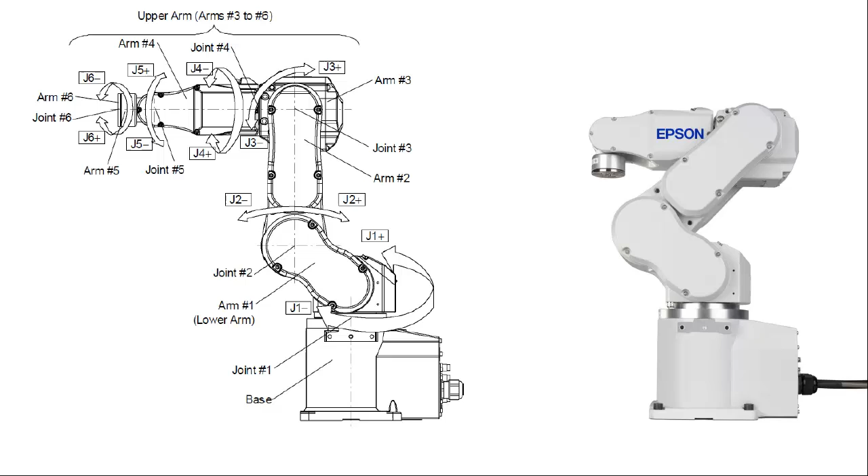The Epson C3 is a compact 6 degree of freedom robotic arm designed primarily for pick-and-place use. It is driven by either an RC170 or RC180 controller, a compact controller with Ethernet and USB connectivity that runs on Epson's proprietary SPEL Plus language.

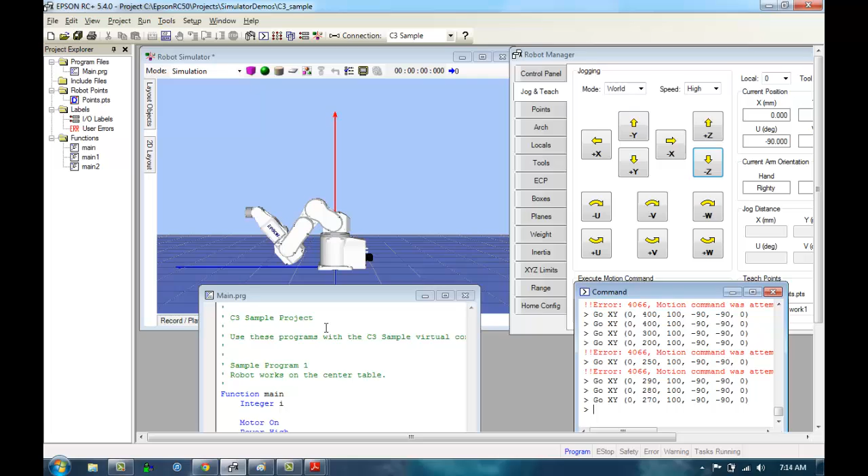The RC Plus 5.0 software is a suite that features a full simulator, including virtual TCP/IP communications in the full version of RC Plus, an SPEL Plus programming environment, also featuring command line functionality, and a robot manager and configuration interface.

To start out, the user first needs to connect to a controller. This can be a real controller or a simulated controller. In this case, I'm using a simulated controller, so in order to visualize what I'm doing, I need to open the simulator window. The RC Plus simulator allows the user to place objects of many different geometries in the scene. It is also able to detect collisions between the robot and these objects.

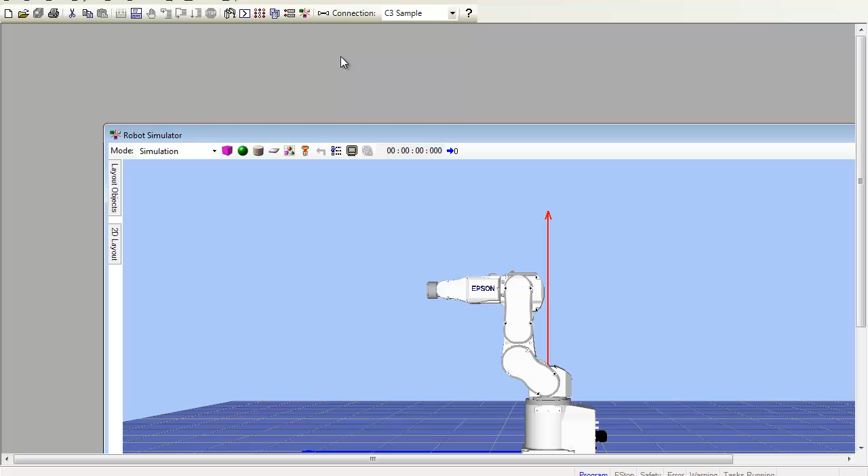We are able to test our SPEL Plus code on the simulator by running it using the Run pop-up window. This is a simple demonstration of a pick-and-place implementation using the C3. We're able to also issue commands using the command window.

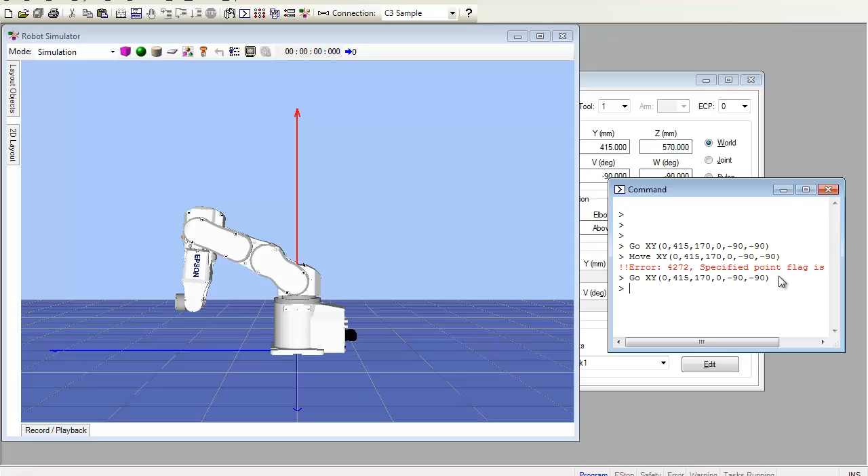The SPEL Plus language is a proprietary robot controller programming language designed by Epson. It runs natively on their range of industrial robot controllers, such as the RC170 and RC180. The language features a rich library of robot control and motion commands, serial input and output commands, multi-threading commands, and system management commands. It also features a number of mathematical functions, logical operators, and control sequences, as is expected from a programming language.

Since the language and controller have native support for TCP/IP communications, we are able to interface with the controller from any TCP/IP enabled device.

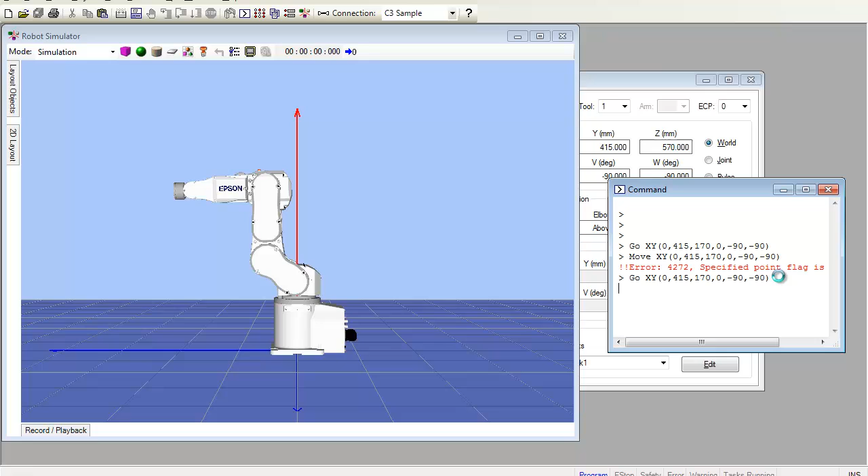There are three basic motion commands in the SPEL Plus language: jump, go, and move. The jump command is specifically designed for pick-and-place applications, and consists of an upward movement in the Z direction, followed by a movement in the XY plane, and finally a downwards movement in the Z direction. The go command entails a point-to-point movement in the X, Y, and Z axes, neglecting the path between the 2 points. The move command is similar, but the path is linearly interpolated between the points.

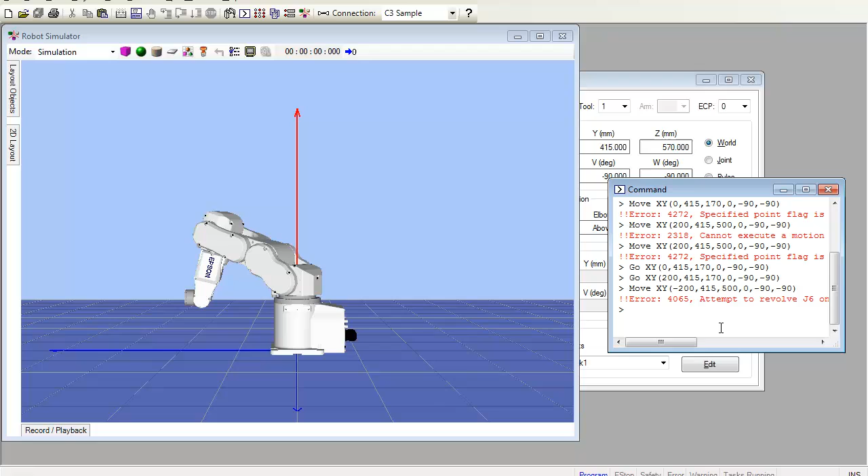While the move command tends to be more predictable, there are some instances in which it will be unable to find a solution, as the linear path between the two given points is undefined for some values. In addition to choosing between go and move, the user is also able to specify a continuous or non-continuous motion profile. In non-continuous mode, the arm accelerates and decelerates at the beginning and end of each movement, respectively. This is to prevent unnecessary wear and tear as a result of abrupt stops and starts.

In continuous mode, the robot moves at a constant velocity throughout the course of the movement. With continuous motion, we are able to issue sequential motion commands resulting in smooth motion along an arbitrary path.

Issuing commands over TCP/IP is not too difficult a task. Since the SPEL Plus language features good support for TCP/IP communications, receiving commands is relatively simple. In addition to this, the SPEL Plus language has a dedicated function for parsing delimited strings, allowing the user to send multiple values in a single transmission and interpret the transmission with relative ease. This way, we can send one pose update every transmission.

The problem lies in updating the pose value without interrupting the controller's read cycle. We can do this by establishing a multi-threaded programming approach using the XQT command, with one thread dedicated to handling the TCP connection and receiving, parsing, and writing numbers to a set of global variables, and another thread dedicated to executing motion commands, which take the global variables as arguments. The two threads pass a token between each other for permission to access the global variables in order to prevent simultaneous attempts at reading and writing.